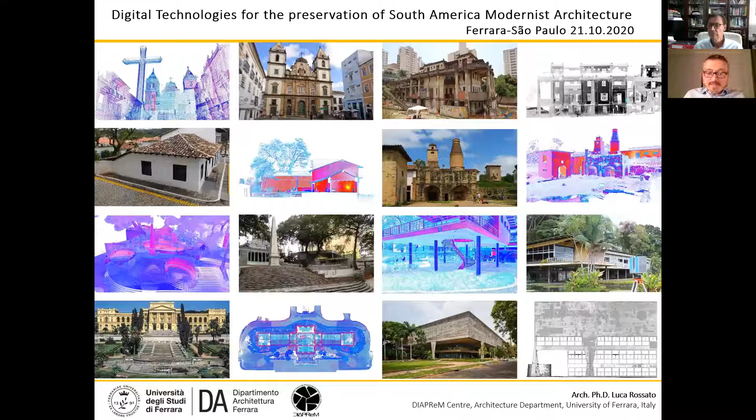In these 15 years, we actually were able to put together a very good, in my opinion, network of cooperation. Here you can see some of the institutions that are partners of the Department of Architecture here at UniFe. Among them, the Mackenzie University and the USP in São Paulo are for sure the best partners that we have found in these years.

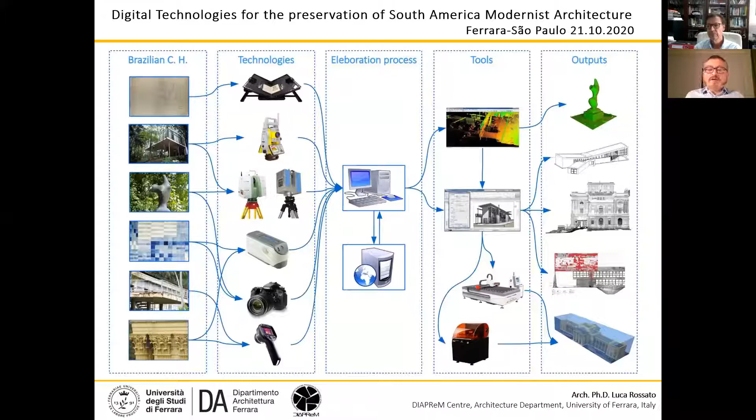I like to start the show of the case studies with this scheme, which represents more or less our way of doing investigations. So we follow the best practices, we follow the technical development, and then we try to carry out pilot projects to test equipments and our knowledge in different contexts.

This makes us able to validate the toolkit and the methodology, and then to improve the collaboration with the local partner. Between Italy and Brazil, this cooperation, I have to say, was very, very good.

So I'm going to show you what we have done with Mackenzie University, starting from integrated 3D survey, which is one of the core activities at the DIAPReM Center. The project was conceived in 2014 in cooperation with Mackenzie and the Department of Cultural Heritage in São Paulo, coordinated by myself, the colleague Denise Azevedo, and Mariana Rolib.

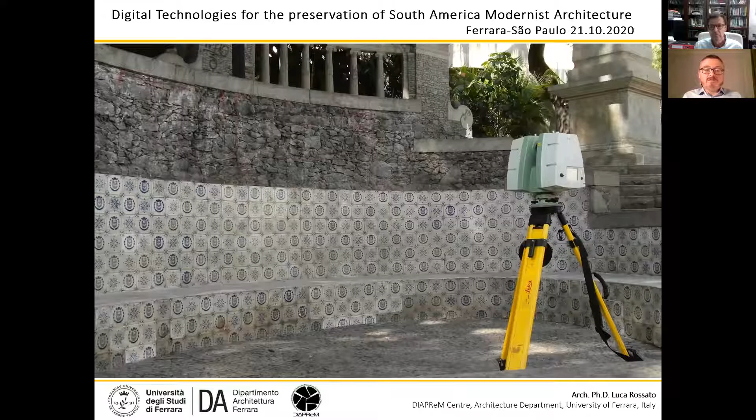You see some pictures of the documentation activities by laser scanner. Federica Maietti was also there during the activity with our technician Guido Galvani, who is usually in charge of the coordination on field for this kind of activity.

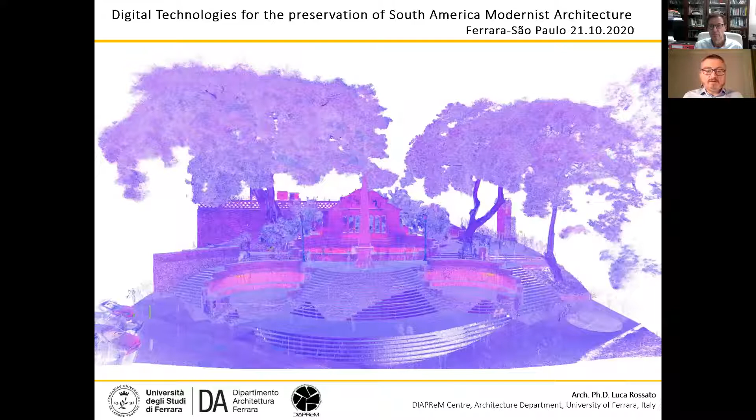Here is the generated point cloud, so the equipment was able to catch millions of points in the space, and now we have this database that could be very useful to plan the restoration works on site.

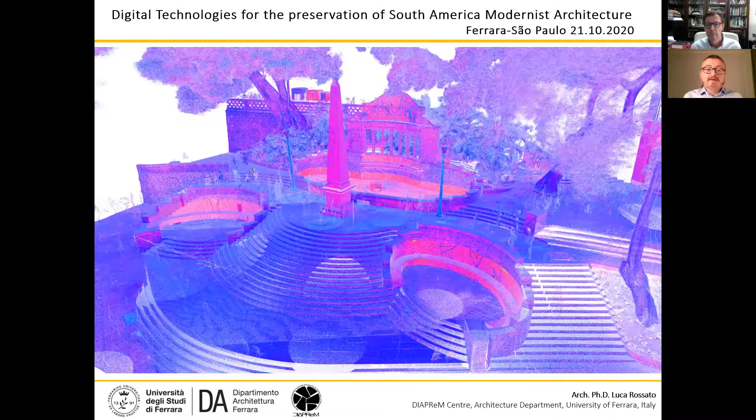Actually, you can compare the design of the layout of the pavement from laser scan and overlay it in red with the CAD drawings that the municipality currently has in its archive. They were quite accurate, as you can see from this overlapping image.

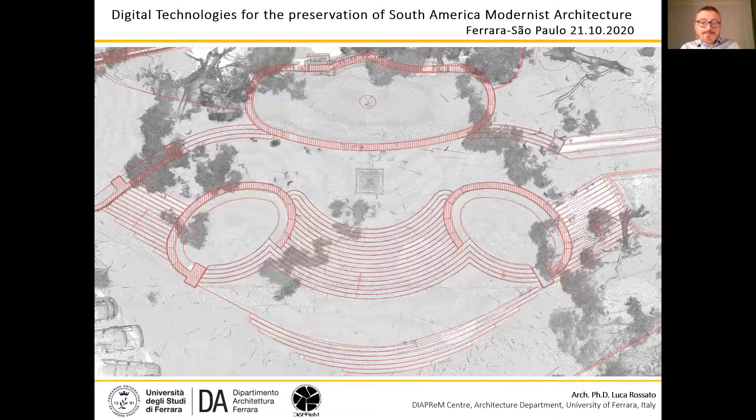It's possible to cut the place as if it was a cake, so we can have some slices to check the difference between different levels of the place. It's also possible to have a silhouette for other investigations based on distances of the object. In this case, you see the silhouette cutting the obelisk of the square.

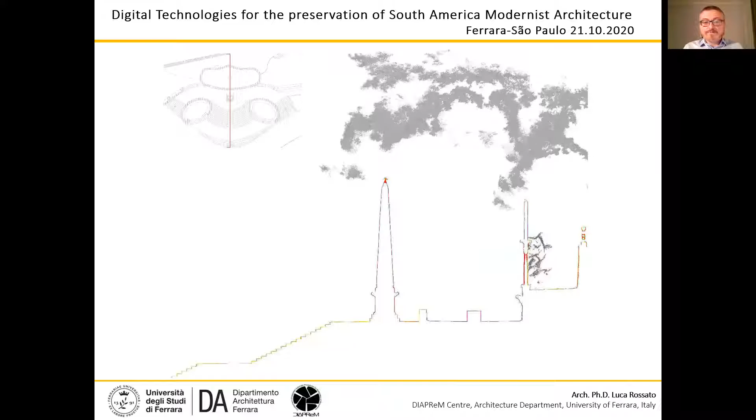It's possible to highlight some architectural features, like in this case, the obelisk can be analyzed and cut from the rest of the context, and it can also be prototyped in our laboratory, as we have this very accurate 3D model.

Before going to the next case study, I'd like to say that we are also preparing a book about this cooperation, written by Walter Caldana, Romeo Farinella, and Laura Bruzzese, where this case study will be part of the text. So very soon we will have this new publication, and for the book I wrote this chapter about Largo da Memoria.

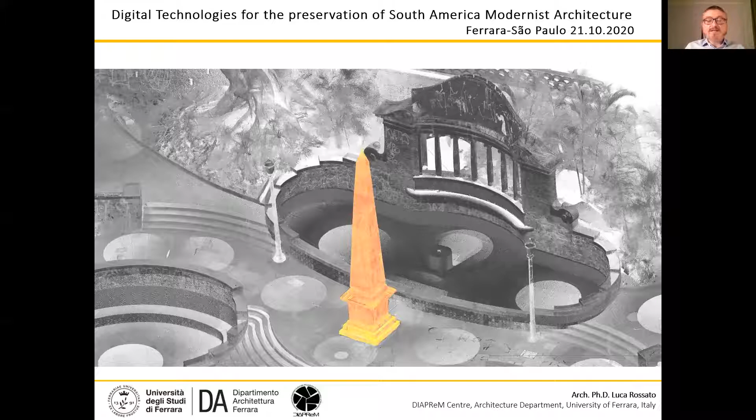I think it's another brick for this cooperation, as Angelica mentioned before.

Very recently, the documentation of the Parque da Independência in São Paulo was carried out in different steps. At the moment, we completed the survey of the Ipiranga Museum, in cooperation with USP São Paulo and Professor Beatriz Mugayar Kühl. And in 2018, we went there again to complete the survey of the monument at the end of the big axis, the Monumento Independência. Mackenzie University offered logistic support for the activities, and there was also a moment of technology transfer with the students.

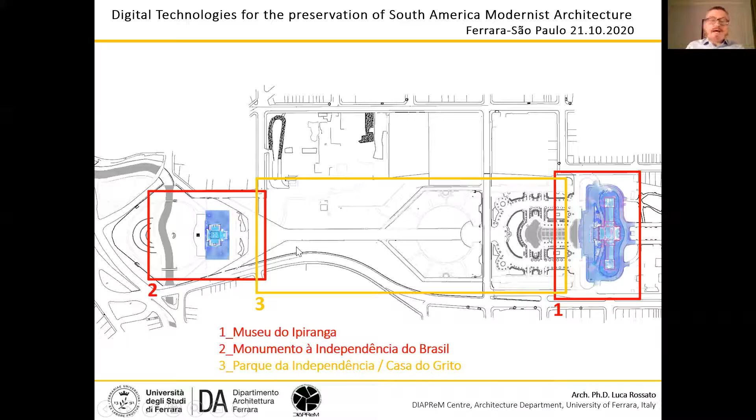You know the area, so I'll go quickly. It's quite big - we signed this agreement with USP for the digitization of the whole area, which is almost 900 meters long and 200 meters wide. After this pandemic situation, we hope to be able to go there and complete the missing part, the orange one, number 3 - basically the simplest part, the park between the two buildings. When completed, the database will be the biggest digital database of cultural heritage in South America. We really think this can be one of the most important activities for our center in Brazil.

I have to thank again for the cooperation, the logistic support during this digital survey. It was an exchange - Mackenzie offered the logistic support, and then we offered some technology transfer for some students of Mackenzie.

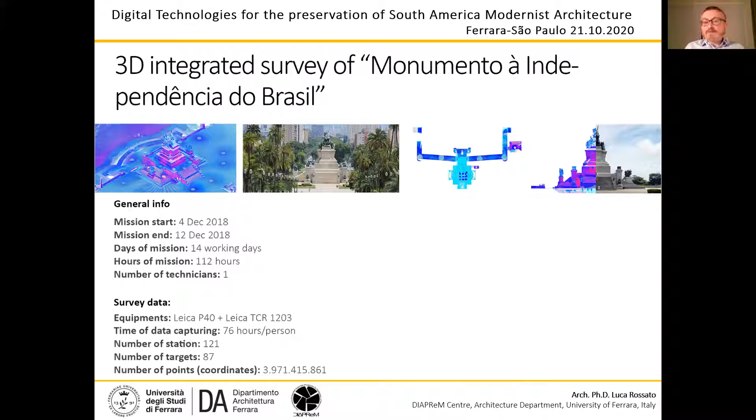As you can see, in this case the number of points was huge, almost 4 billion coordinates, over 14 working days. So the monument was really documented in a very accurate way. Beside every image we can share, this is the most important in my opinion - our work on field, with Professor Marcello Balzani and Guillermo Michelin, who were part of this technology transfer program. This was the most interesting part - sharing our methodology of digital documentation with the Mackenzie students to start cooperation in this field, which is usually very difficult because it requires a skilled background in topographic systems. For these young students it wasn't easy, but it was a starting point to share our methodology and grow a group at Mackenzie based on these technologies.

After that, I have to mention that the cooperation with Mackenzie was very effective in the development of joint research papers. These cooperation outputs were very important for us as part of our academic background. We started with the first publication with Florio for the seminar Arquitetura e Documentação - I think it was the 5th Ibero-American seminar - with this paper based on redrawing techniques for the investigation of projects of modern architecture.

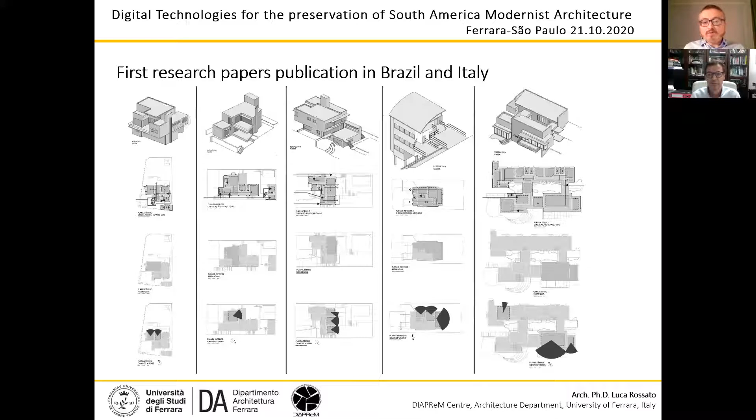These are the models developed at Mackenzie University and published in the magazine. These were the models developed in Ferrara. Later, Federica Maietti will show you the whole project that we call documentation of the project - the investigation that can enhance also the design techniques of this amazing master of the modern period.

Another area of cooperation was the UID conference proceedings. UID is the Italian Union for Drawing, so for us it's one of the most important occasions. Annually we have this conference, and thanks to Anna Tagliari and Wilson Florio, we published in 2019 and 2020 two contributions on unbuilt architectures.

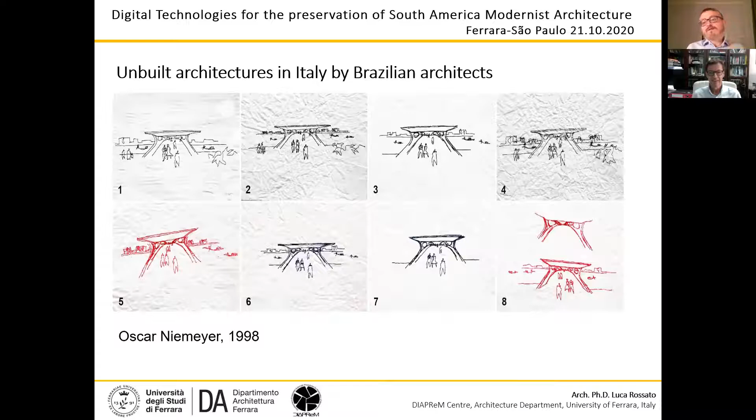It was an idea of Anna and Wilson to develop a project based on unbuilt architectures of Brazilian architects in Italy. When they proposed this to us, we accepted the challenge, and as Florio mentioned, I wasn't aware of this beautiful project by Oscar Niemeyer for the bridge in Venice that you can see in these drawings. In 1998, Niemeyer designed this proposal for a bridge on the Canal Grande in Venice, and then we prepared a 3D model following the original drawings of the master to show the idea of placing a new bridge on the Canal Grande, which is a very hard challenge even nowadays.

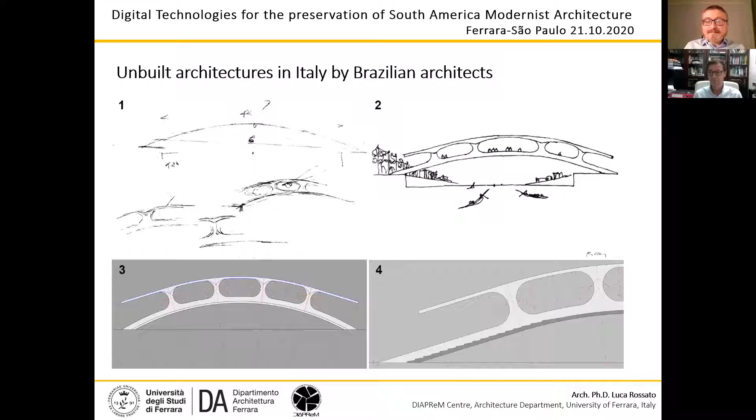If you go to Venice, you see that the Calatrava proposal is in a different position, but it shows us how difficult it is to realize a very good bridge in Venice nowadays, in terms of technological problems and also impact on the city. So I discovered these drawings, and they were very interesting.

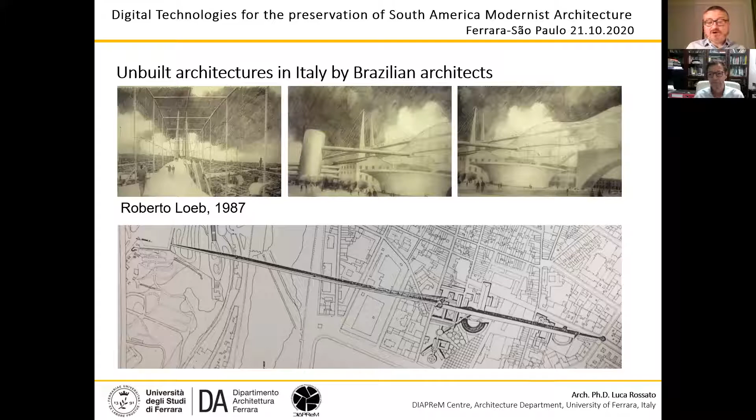The same was true for the project that I knew, because it was a very important competition in Italy by Roberto Loeb - the unbuilt proposal for Le Murate in Florence. I think Florio is going to show you some images about this, as he mentioned. The paper analyzed the point of view of Loeb, which focused attention on a connection between two or three places of Florence with this huge structure.

And then along the years, we kept working on this exchange of ideas. I like this term, the exchange of idea, because during workshops and seminars that we organized in São Paulo and in Ferrara, this was one of the main important thing. So, for example, we started in 2015.

You see in the picture Walter Caldana delivering a lecture to our students in Mackenzie. This workshop was based on the area of Anhangabaú, and then the students proposed some ideas. It was nice because they were comparing the layout of Ferrara Historic Center, where they live, with the external layout of São Paulo, let's say downtown, even if we know that São Paulo doesn't have a real downtown.

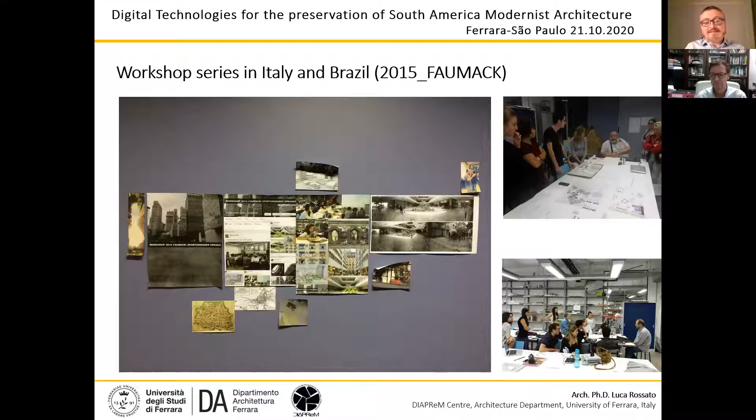So we went ahead in this cooperation. In 2016, it was the opposite. So the Brazilian students came to Ferrara in July, and we organized a workshop based on contemporary design in historic centers, a very challenging topic for students that were trained basically in delivering new buildings, designing buildings where nothing is already there, not dealing with historic centers. So this was the first workshop based on this issue.

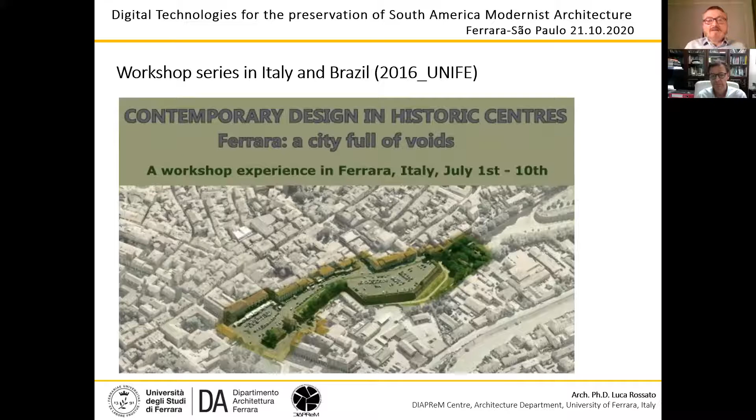You see, it was based in Ferrara along the walls of the city, the historical walls. And again, it was a very challenging activity for all the people and the professors involved in this activity.

I'd like to mention also the 2017 workshop, because again, in cooperation with Mackenzie, we were able to gather students from different parts of the world. This was one of the best workshops we have ever organized in Ferrara. You have to imagine that we mixed Brazilian students with Indian students, New Zealand students, Georgian students, and Italian students. So different continents, different point of view, and again, the sharing of background and idea.

I'm talking also to the students that are following this lecture, this meeting, and I think this was the most interesting thing: the sharing of ideas related to cultural heritage and to its preservation.

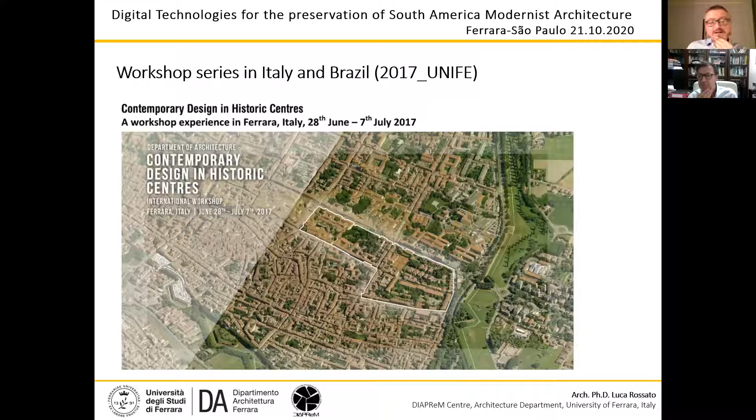I hope to be able to organize new other workshops on this field. Who knows, after the pandemic. Unfortunately, we stopped in 2018 because some people from our staff quit, so we weren't able to organize new workshops. I hope to be able with Mackenzie to organize new workshops in São Paulo or in Ferrara on this topic or other urban topics.

On this issue, the seminars, Federica Maietti will speak about the important activity carried out in the framework of the summer school after the damages. So I just want to highlight that this is part of our seminar and teaching activity organized, where Mackenzie is a partner. Some professors are also in the academic board of the school.

Last field of joint investigation is the international publications that we were able to deliver in these years. First of all, I still have to thank Felipe Melachos for his available help and support here in Ferrara. Felipe spent almost a year with us for the joint PhD program, and his activity was very, very good, also in terms of publication, because we were able to publish in two very important magazines our studies on

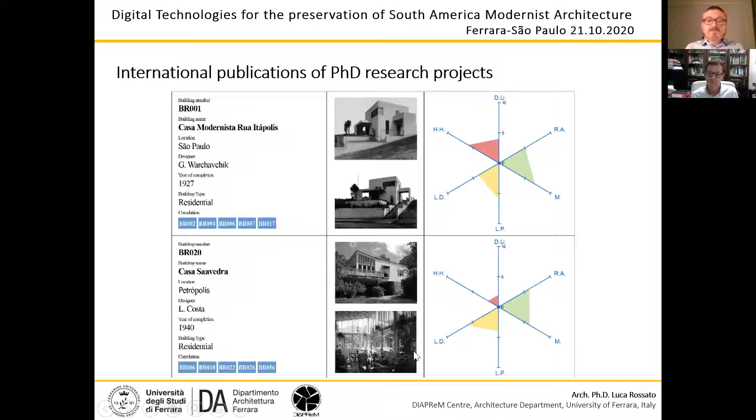So you see some examples of the database. Looking at the diagram, you see very quickly how the building is protected or not. And these are some images of this 3 years research project.

Then deep into the subject, we went analyzing also the main factors affecting the modern architecture in Brazil and India. We discovered that 3 factors are affecting these architectures: the urban factors, so the aggression of the city, the technological factors, because these buildings were built with a very high technology level for the period, and the natural factors, because many of them are facing the growing of very strong vegetation all around them.

This brought to other schemes related to these 3 urban factors, such as urban pressure, vegetation pressure, the level of innovation related to technology factor, material characteristics, etc.

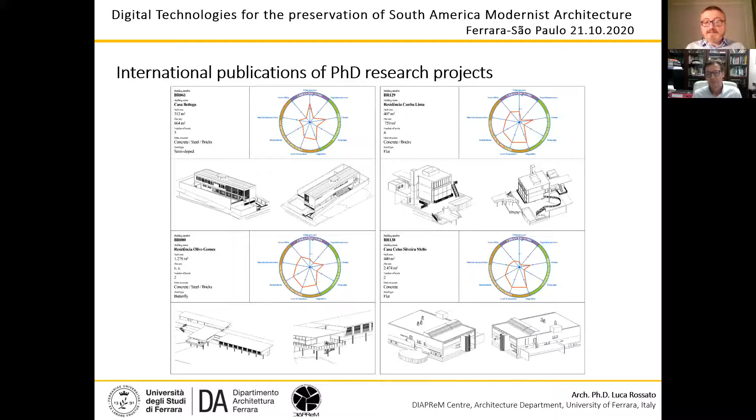Again, thanks to this database, it's possible to see the condition and the risk of each of the buildings. These are some of the diagrams developed during this activity.

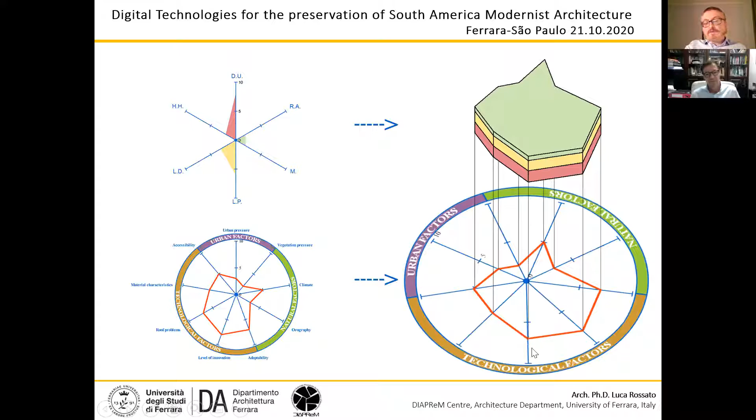Then it's possible, obviously, to join the two diagrams, the one related to the three levels of danger, red, green, and yellow, and the one related to the three urban factors. And it's possible to extrude it in a three-dimensional diagram, able to show three-dimensionally all this analysis carried out in only one scheme, which is the mix between the two that we have seen previously.

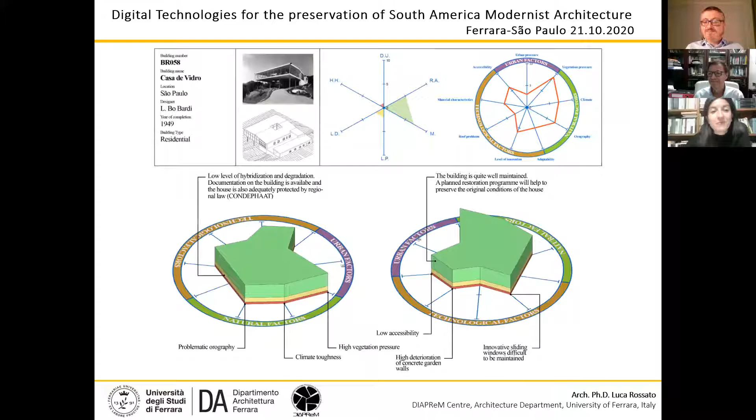I think that on this project about modern architecture, Federica is telling us a lot of very nice things. So I'd like to give Federica the possibility to show us her lecture. Thank you very much, and I stay here for any questions, obviously.

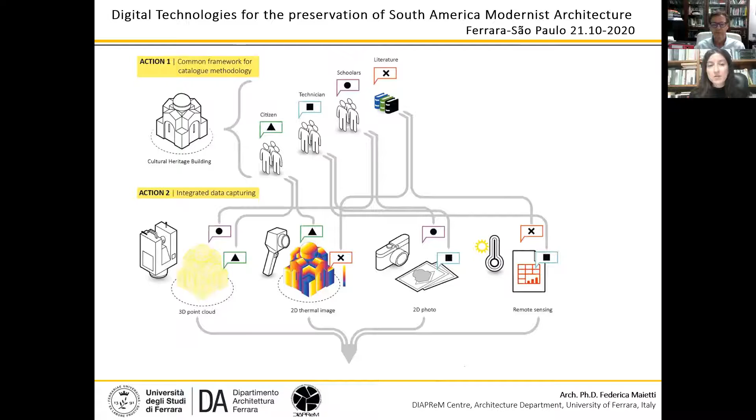Here you can see that the first point of this project was to create knowledge involving different stakeholders and different users. The first point was to understand the need to use digitization today, what people can really do with this digital data, and what's possible for heritage preservation by using this technology. The project was related to the integration of several techniques and instruments.

The main point was to put in new meanings, to work on this so-called semantic modeling. That means we need to work on digital data, but add information to this data - data about data, and information and knowledge about what we have digitized. So the main feature of the project is a platform that is currently working and under improvement.

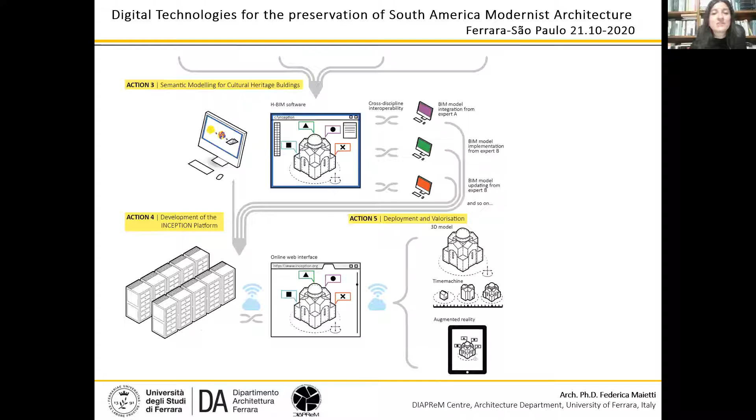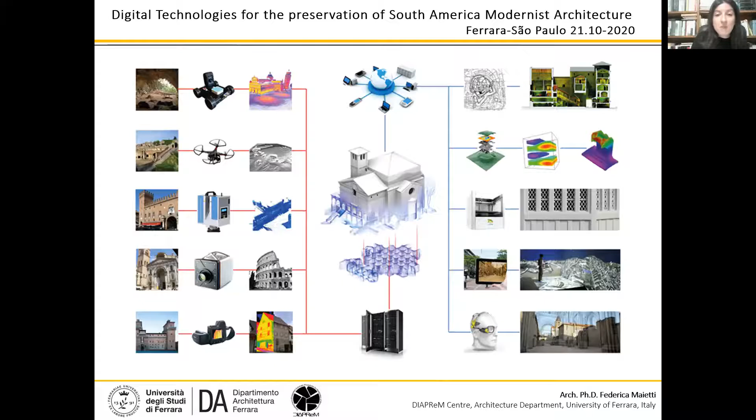Survey is one of the main points of my research activities, integrated with diagnostic procedures. One of the main topics of my research field is related to how to use digital data to understand the state of conservation of historical surfaces, also by using advanced procedures in processing this digital data acquired by different technologies.

The section about representation, of course, relates to traditional representation, and you will see examples of one of the main steps of documentation applied to modernist heritage, very related to the traditional way to study, analyze, and sketch in order to understand monuments. Representation is also...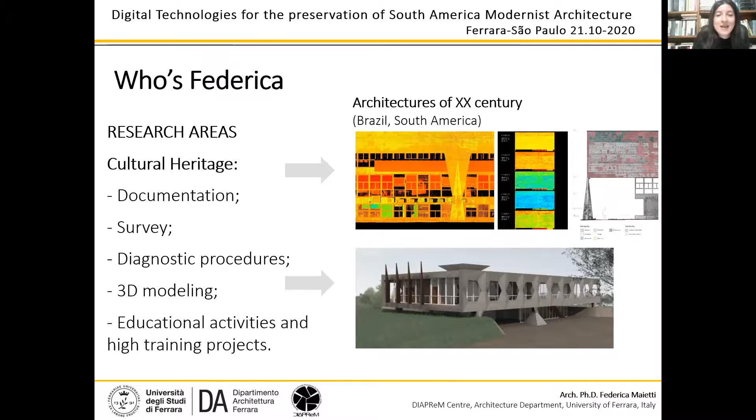Reconnecting to some parts of Luca's presentation about this long experience focused on modernist architecture in Latin America, developed by the DIAPReM Centre, as you already heard, according to different scenarios - historical analysis, documentation, survey and representation, diagnostic assessment, and several joint research have been carried out, as Luca listed in a very clear and great overview.

What about the application of this experience of research, the application of these digital technologies on modernist architecture within educational courses at the Department of Architecture? The research field on documentation, survey, and representation of modernist heritage has been developed even through PhD, and Luca is one of the main examples of this application.

International workshop, educational and training experience - the course that I manage is advanced and integrated survey and techniques of representation. The overall methodology resulted from the selection of the most representative modernist architecture of Brazil and Latin America, an additional part of this overall work that sees the DIAPReM Centre involved in Brazil and Latin America. It's a sort of joint activity, research and applied research on site.

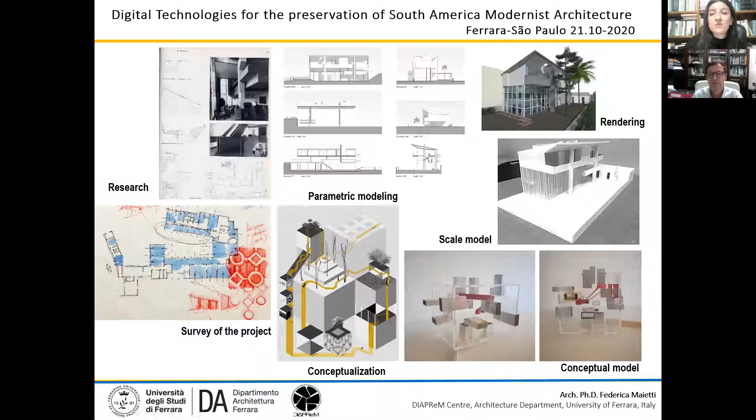Of course, the rendering part of the procedure is very relevant in representing something that is surveyed, even if indirectly. So the rendering section was very developed during the course, and the scale model is, as I already mentioned, one of the great ways for students to engage materially and physically with the meanings of architecture.

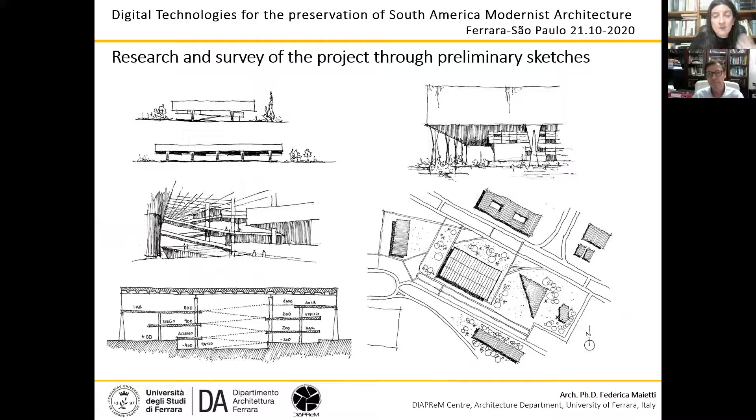So the part related to sketches is something you can see - I just put an example. Of course, students produced a lot of sketches with different meanings: drawings to analyze modernist heritage in different contexts, drawings to understand the urban or landscape environment, and drawings to put measures, creating a summary of the understanding of the main dimensions of the buildings.

The study of the survey of the project and the sketches of the survey are not limited to the traditional sketches we use when we put measures on the drawing. It's wider - the analysis, through these traditional drawings, encompasses a lot of features related to the building. Here you can see just an example.

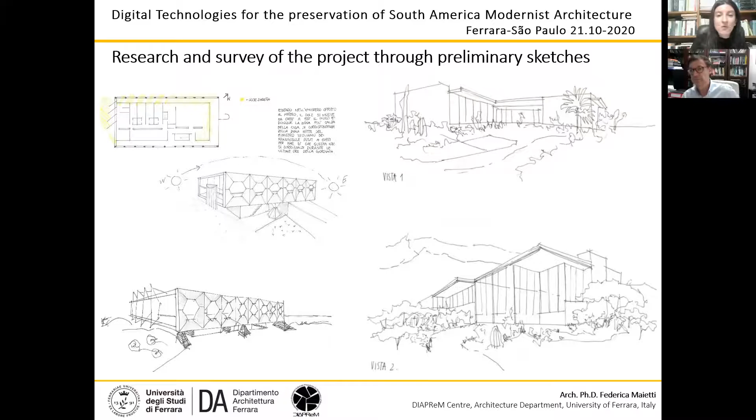How the orientation of the building is relevant for understanding the form, and also for rendering, being able to catch the light as the architect conceived the relationship between the architecture and the environment. So it was really interesting to have also this database of digitized traditional manual sketches as a starting point for the survey of the project.

The part of the research related to parametric modeling is more conventional, though we are proud to say we try to give a strong methodological approach also to software, not only to technology. Exactly as teaching to use a laser scanner doesn't mean teaching to push a button and watch it scan the building, representing architecture through new software such as BIM means explaining the meaning of representation in this digital environment.

So the approach is methodological, because we know that software as well as technologies are evolving rapidly. At educational level, we have to transfer something more than how to use a software or an instrument like a 3D laser scanner. So the approach is really, really strongly methodological.

The results are very interesting because the potential of building information modeling is great. Here you can see an example of what students produced - the FAUUSP by Villanova Artigas - and you can see the work of students in analyzing architecture into a parametric model, with the huge work of rendering to represent all the features of the building. Here you can see some interior and exterior renderings made by students.

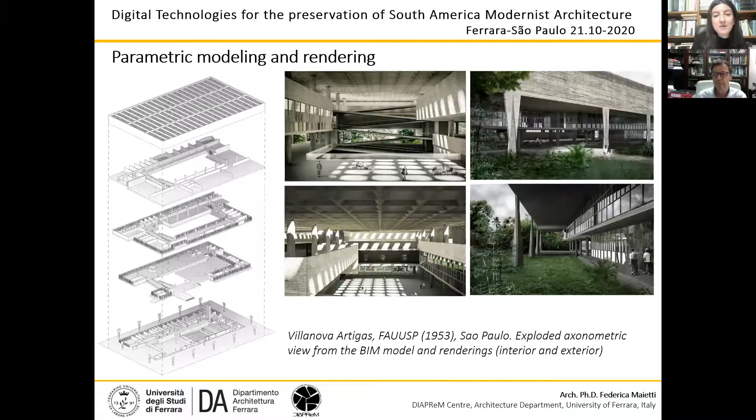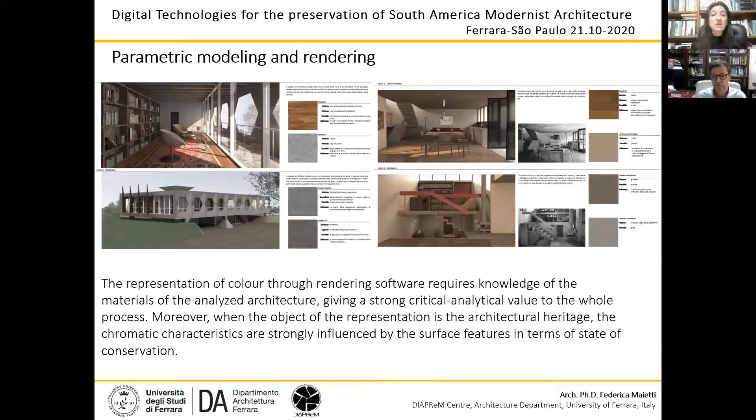The part related to architectural features, I like to call the architecture soul, because we need to understand the soul of architecture is also related to the way of studying colors, state of conservation, materials, and so on. So all these skills to be transferred related to knowledge on software gives a strong critical analytical value to the whole process. The way to analyze and represent textures and materials is strongly related to the first step of the research, the understanding and meanings of architecture.

It was great to understand the great ability of students in understanding features of modernist architecture by creating these panels related to conceptualization, which was a very good connection between the part of survey representation and the part of analysis and understanding.

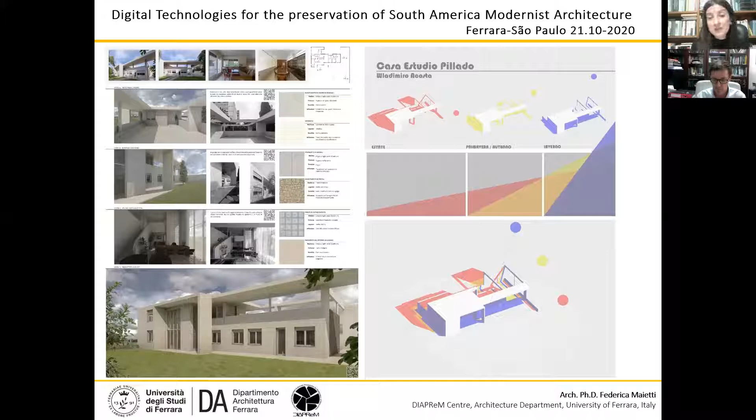I have a lot of examples, I will try to summarize this part, because this kind of work at educational level, I think we are in the seventh year, started by Professor Marcello Balzani, and then I had the responsibility of this course. We have a very huge and great database of different outputs and outcomes from this experience. Every year is different, not only because we assign different modernist architecture to be analyzed and explored, but because young students have different sensitivity to architecture, to understanding, to representation. So we really have great experience and great analysis of several architectures.

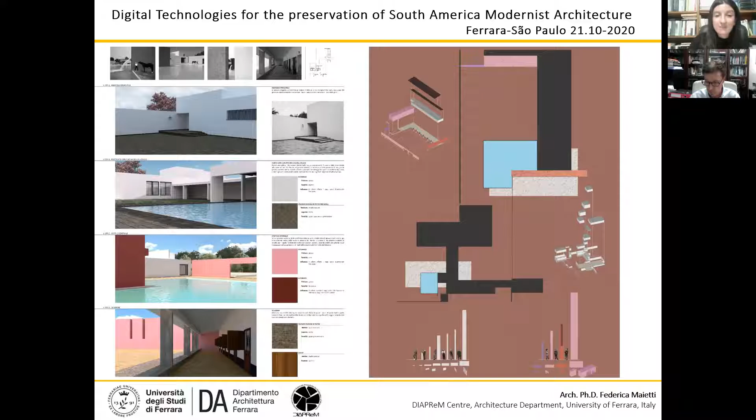We started from Brazil, and then we addressed all of Latin America, in order to give students a broad data set of architecture to be analyzed.

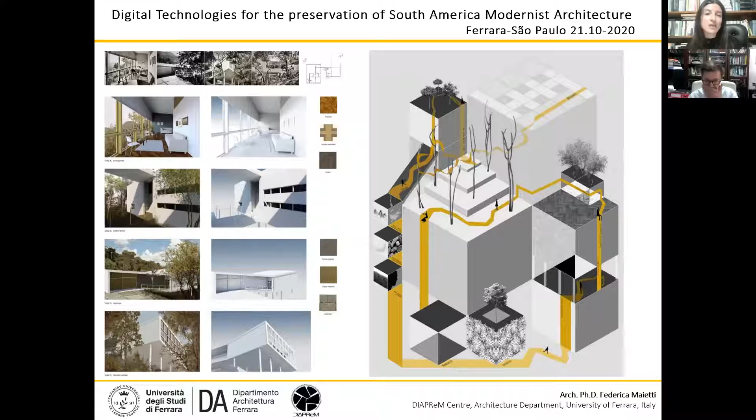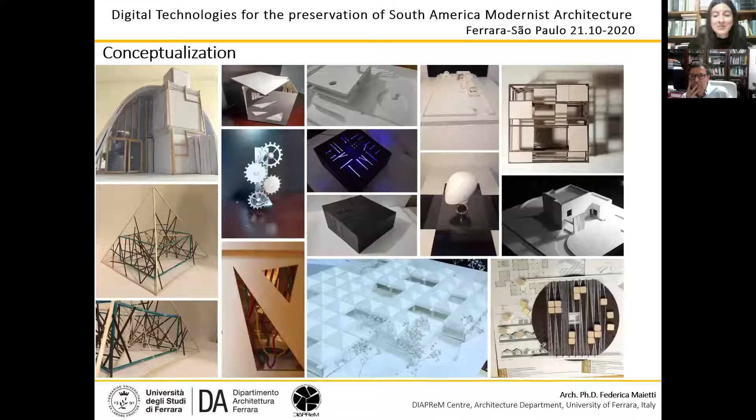Here you can see an example of the conceptualization, and it's interesting to see, thanks to some views in rendering, the architecture represented and the understanding of students, and the conceptualization that students gave to this architecture. The concept work, the analysis for the conceptualization of architecture, was strongly supported for several years during the course. Here you can see just some examples, and as shown before, it's interesting to see differences. The architecture, such as in this example, is shaped in this way with specific features, analyzed deeply and represented.

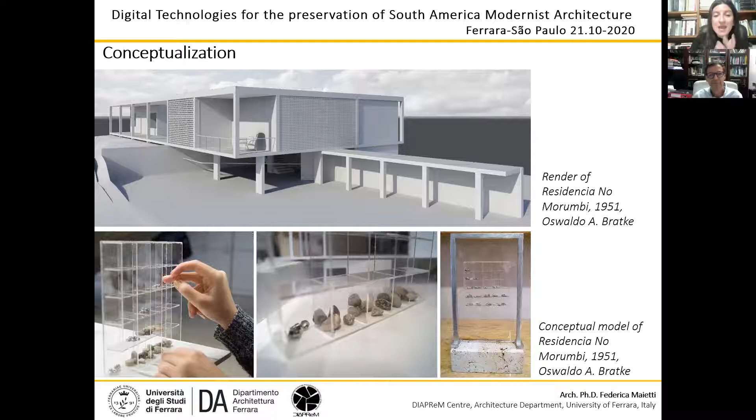The conceptualization is something really amazing in catching specific features or specific thoughts of the architects, because students are used to study. It's not so frequent in classes of survey representation to have students studying books, but in this course I'm proud to say that students need to study a lot. Reading the documents from the architect, reading interviews, reading everything that can be useful to understand what they are doing, what they are drawing, what they are representing. This was applied by students in creating these amazing conceptual models.

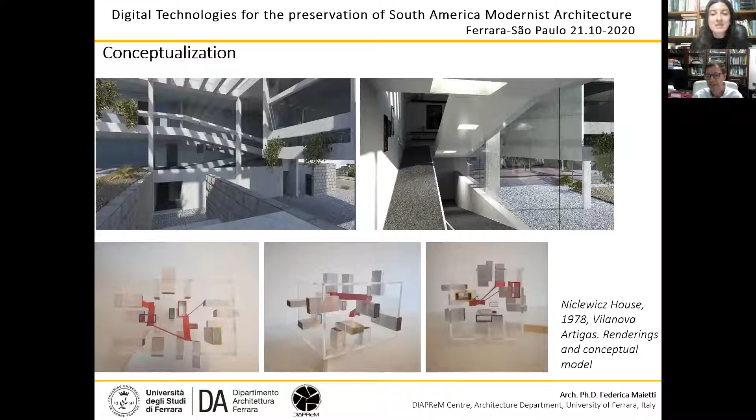Just some examples of what we did, analyzing architectures and creating this conceptualization, these conceptual models with a lot of materials, a lot of features, a lot of insights to be highlighted.

I think once again the great part of this work is the overall process: the understanding of what survey means, even in an indirect way, as the survey of the project requires; what it means to represent thanks to parametric modeling or rendering; and what's the meaning in finding the conceptualization of the main features and the main significance of the project.

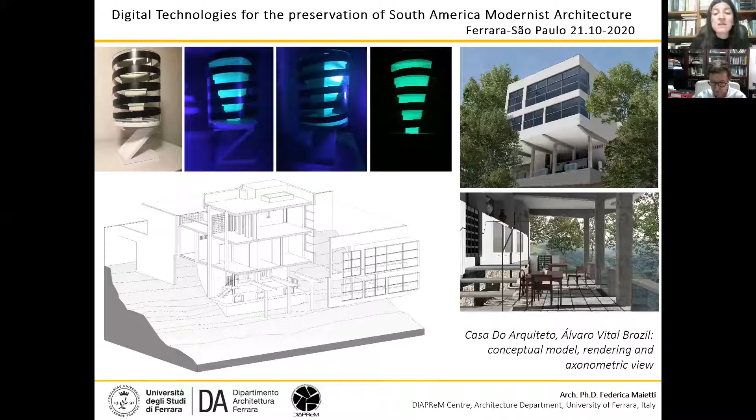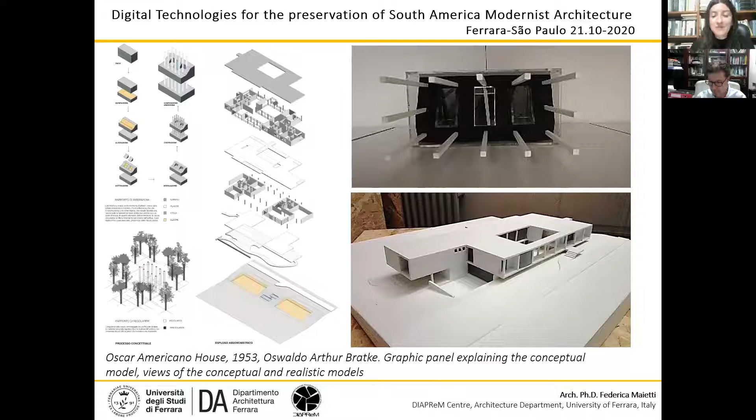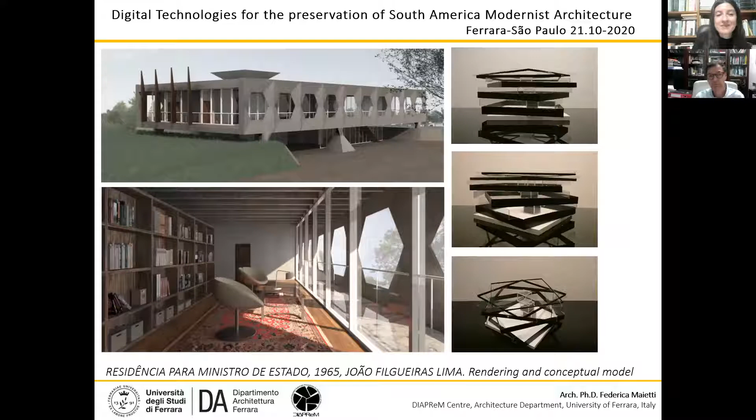Just to show you an additional example in the overall process, the comparison between the realistic physical model and the conceptual model was really a great part of the discussion during exams of students at the end of the course. I would like to show you a lot of drawings and pictures, but I think the overall meaning of this work is clear.

I would just like to highlight that we had the opportunity to present this kind of work on modernist heritage within a PhD workshop in 2019, held in Ferrara under the International Doctorate in Architecture and Urban Planning. The title of this workshop was Innovative Research for the Digital Challenge.

It was the opportunity to present this procedure, which I presented now, also to PhD students, and also Felipe Melachos was a speaker during this PhD workshop, since Felipe was active in supporting activities during this course on technique of representation. One of the architectures of Eladio Dieste was one of the analyzed architectures when Felipe was in Italy. It was great to have this participation, and it was really an added value having Felipe during the course of technical representation in 2019.

The presentation during the PhD workshop was the opportunity to present activities on modernist heritage, joint activities with Mackenzie University, and for Felipe to explain and present his PhD research.

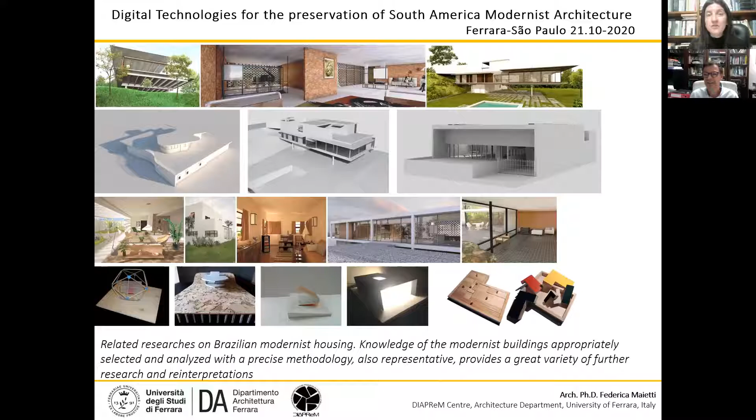And all these huge databases that we have, of course, provide a great opportunity, a great data set for future research and interpretation. Thanks to this educational and training experience, we collected about 200 models on modernist housing mostly, but not only housing, mostly in Brazil, but also in other countries of Latin America, by more than 30 modernist architects between 1928 and 1978. So once again, a huge database that is the starting point for several possible research follow-ups.

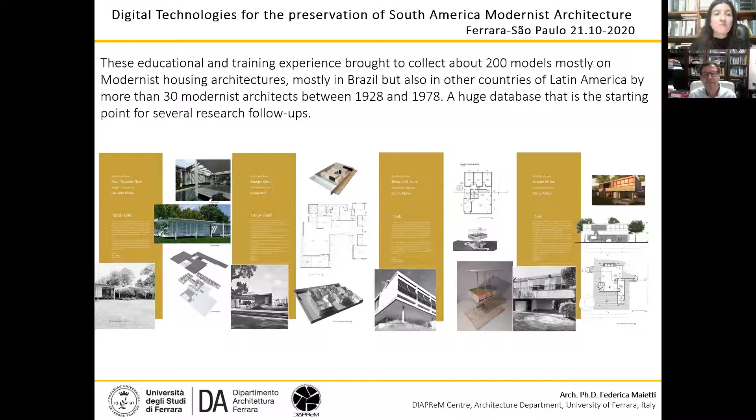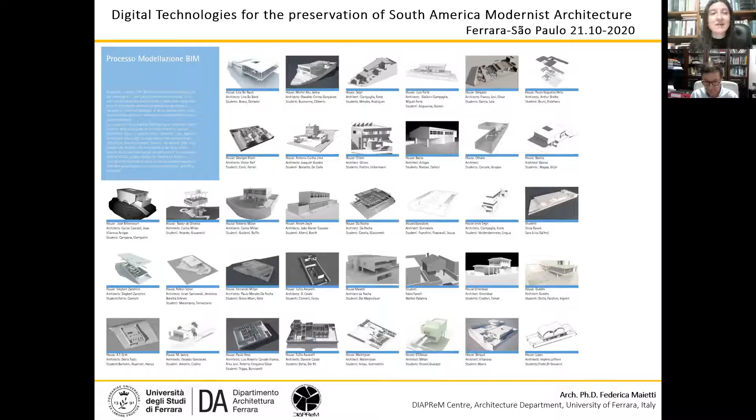And Luca presented some opportunities for this follow-up. So this kind of joint research activity within international cooperation, within educational and training processes, and within advanced research, as Luca did during the PhD, was a way to bring all this knowledge together and to work in the direction of creating a great database of knowledge. Just some mosaics, some pictures related to this database for building information models, but also physical models and conceptual models produced during this activity.

I think I can go to the second part of the presentation, that is connected to education again, and to training. That is the International Summer School After the Damages, Prevention and Safety Solution through Design and Practice on Existing Built Environment, the Italian Experience. That is the title of this research project that we started.

Well, I have to say immediately that the project is financed by Emilia-Romagna region. It was a great experience working together with the region, because we conceived this project in order to capitalize, to use all the experience that the region had after the earthquake in Emilia in 2012. So a sort of need to understand how to work in the direction of managing risk and in the direction of talking about vulnerabilities of existing buildings.

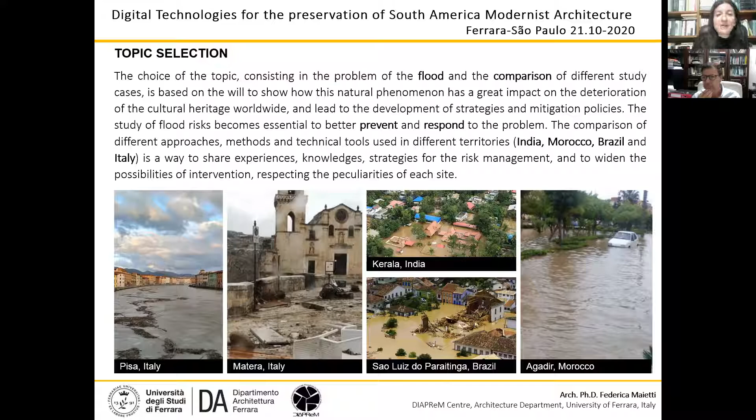The second edition of the summer school will be held from 5th to 20th July 2021. We are also organizing an international award to highlight and show internationally the main projects related to after the damages topics.

So risk mitigation and management of all the issues I listed before: how to work on participation, management, resilience, how to work physically on architecture to save buildings, to work for conservation, preservation, and restoration enhancement, and how to produce effective documentation to save and preserve buildings.

As you can see, we are very active and planning several activities. The two focuses, winter and spring, will face specific topics through lectures organized as intensive days, four hours each day, related to the summer school.

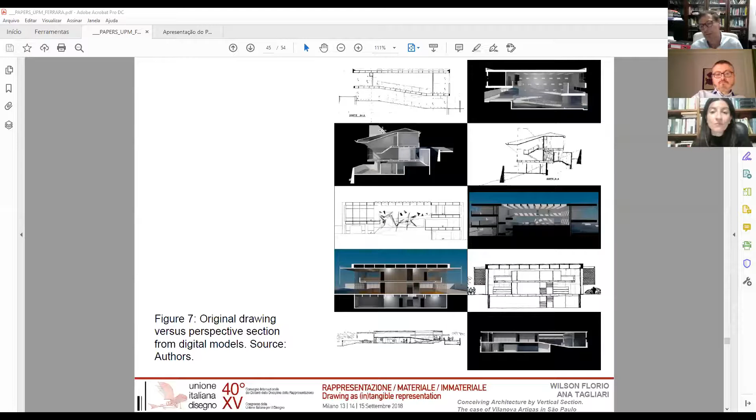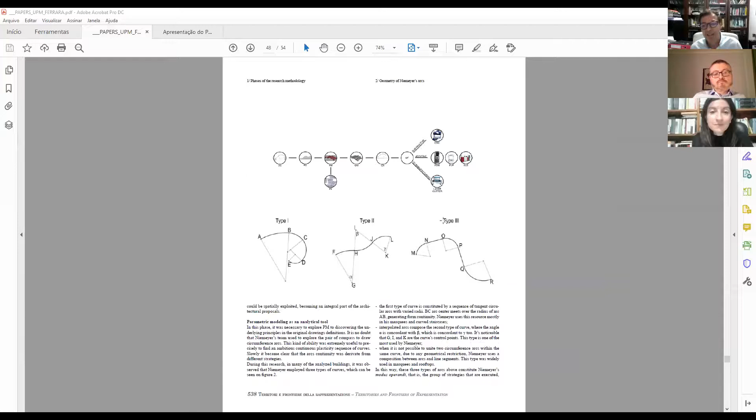A parametria muitas vezes nos ajuda a entender a linguagem do arquiteto, os procedimentos projetuais. No caso do Niemeyer, por exemplo, isso aqui são 3 projetos não construídos dele, que foram publicados também no UID na Itália, no Congresso, muito importante para entender a linguagem do arquiteto Oscar Niemeyer.

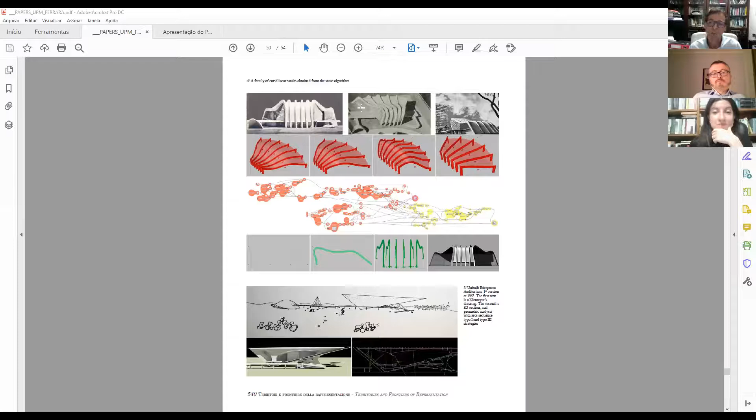Aqui a gente percebe um pouco o poder da modelagem paramétrica. O que vemos é um algoritmo no centro da folha, extremamente abstrato e estranho para quem olha pela primeira vez, mas que permite gerar formas levemente diferentes entre si, criando uma família de objetos, até para entender e interpretar melhor o projeto de um arquiteto. Essa modelagem paramétrica é poderosa no sentido de gerar alternativas a partir do mesmo projeto.

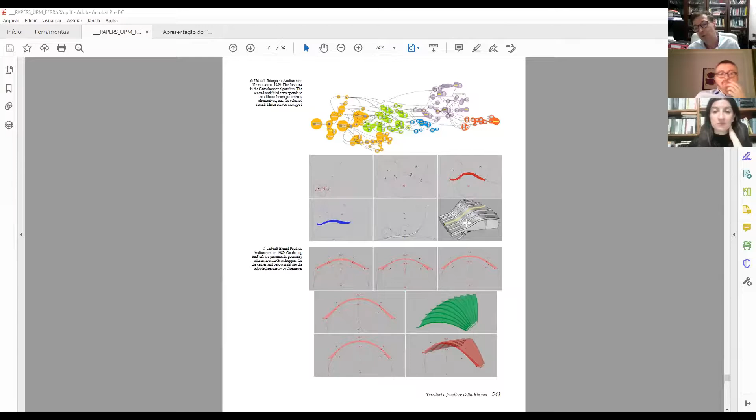Por exemplo, o estudo das superfícies curvilíneas, como vemos nessa imagem. Esse é um auditório não construído no Parque do Ibirapuera, em São Paulo, que eu modelei parametricamente, e depois fizemos modelos físicos, não só daquele do Ibirapuera, mas também o Teatro Popular no Rio de Janeiro. Aqui é tudo impressora 3D.

Mesclando essas tecnologias em prol de uma investigação mais profunda da natureza do projeto. Mais uma vez, a fabricação digital junto com a modelagem paramétrica, modelagem geométrica, com os croquis, tudo isso ajuda muito no aprofundamento do entendimento da natureza do projeto. O rendering é o coroamento de tudo isso. É importante o aluno entender que o rendering é uma imagem extremamente sedutora, mas que não se basta por si só. É importante que o rendering faça parte de uma etapa da investigação, mas não seja o protagonista.

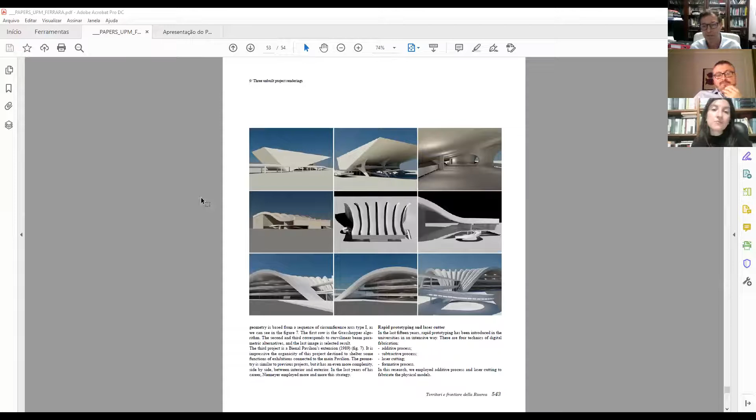Para mim, o protagonismo da investigação está em entender a linguagem do arquiteto. Por isso temos uma atração muito grande pela modelagem paramétrica. Isso é muito interessante para entendermos a natureza das pesquisas usando novas tecnologias, que eu disse que não são tão novas assim.

Impressora 3D, desde 1989 já existe, mas não tinha um custo acessível. Nos últimos 10 anos proliferaram as impressoras 3D. Temos Fab Labs no Brasil inteiro, no mundo inteiro. É uma coisa impressionante. Tudo isso nos favorece a uma investigação, a uma melhor arquitetura, uma melhor cidade, uma melhor sociedade.